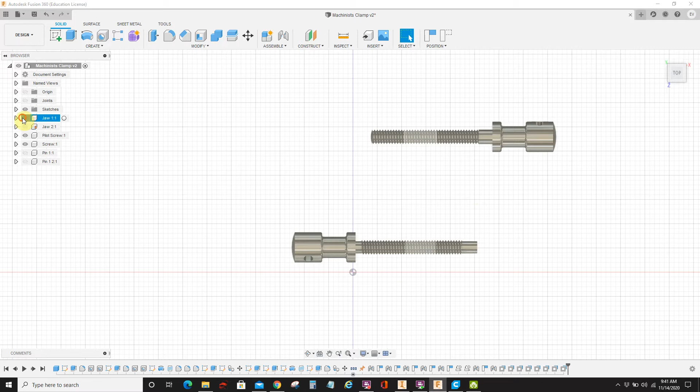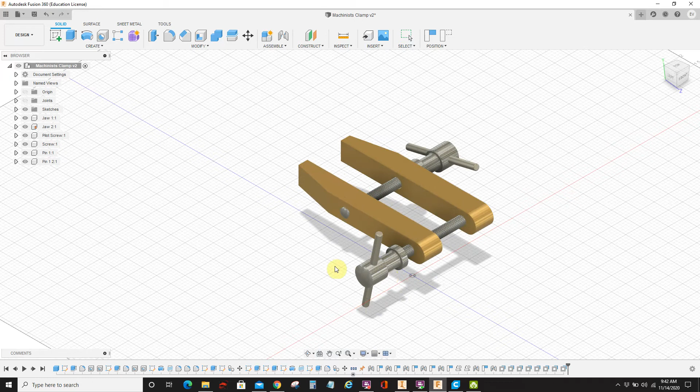Let me show you something else here, a project that I'm working on. Let's pull this out. Make a little clamp. This is a fun piece I did in Fusion. I would love to offer an advanced solid modeling course so we could do more stuff like this. But with the solid modeling course, with the time that we have, you can only go so far. It also depends on how motivated you guys are.

Anyway, back to here. I am such a slob. Alright. This is one of the jaws, and this is very flimsy. And this isn't the jaw I want because this jaw does not have threads in it. That's the other jaw.

Kitty. Where's the other jaw? I just had the damn thing. Sorry about that. I had the darn thing a minute ago. Anyway, there it is. It's behind me.

This is the jaw. This jaw has threads. This one doesn't; this one's got a tolerance. Goes through like that, and then it's to thread in. Anyway, it doesn't thread. So I did a little test thread with the 5/1000th of an inch, and yeah. So I'm going to run this again with 5/1000th of an inch. Now let me show you what I did here.

The printer, I got one of these, see it? There we go. Old school USB cables. I'm trying to show you that you can actually see it. Okay, there we go. These old school USB cables from my old phone that I don't even use anymore. Put it in here. All right. Hello. Got that right? There we go. And then the other end into my computer.

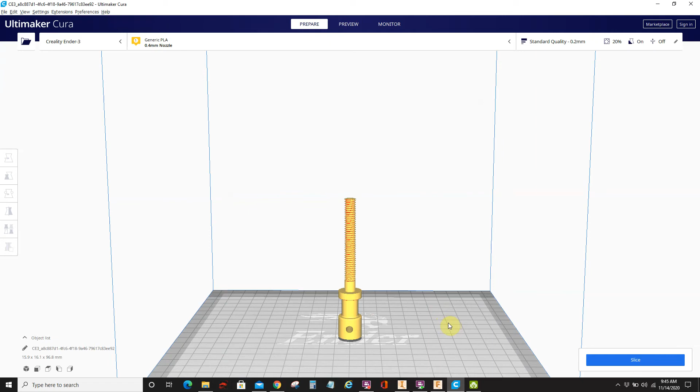And let's go back to... I'm a pro. I'm a visual communications pro. Anyway, go back to Cura. So here's my part. Now, when you plug this in, well, let me unplug it for a second. You go to monitor and you get nothing. Okay. When you plug it back in, you go to monitor, and this pops up.

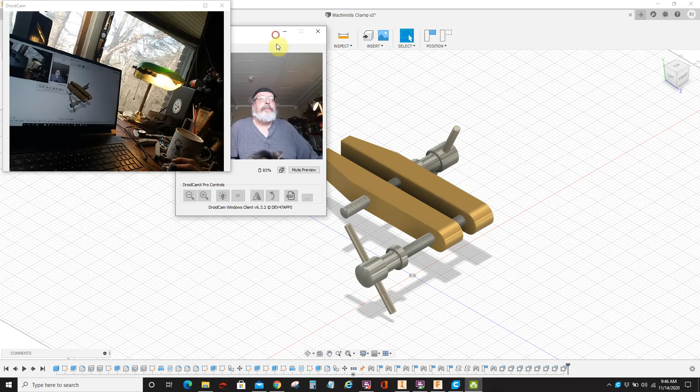And I turn on my printer, and when, let me switch back. You're not gonna be able to see it. Let me do split screen. So I'm gonna do a split screen. Why is that in my way? Okay. Anyway, you're not seeing this. When I hit the, all right, let's just do this. Wait, no, that's cool because you're getting that. I'm so confused. I'll put the camera on the printer. There we go. That's how this is going to work.

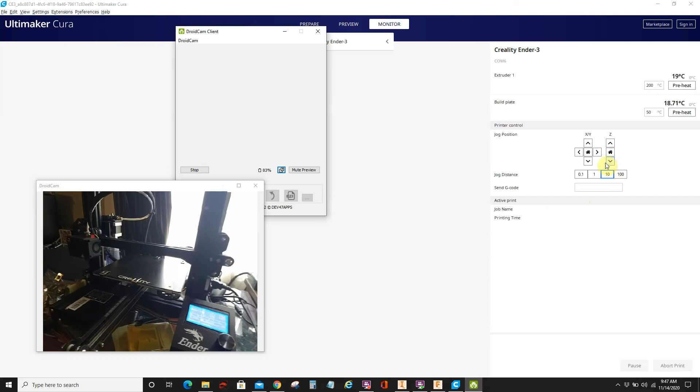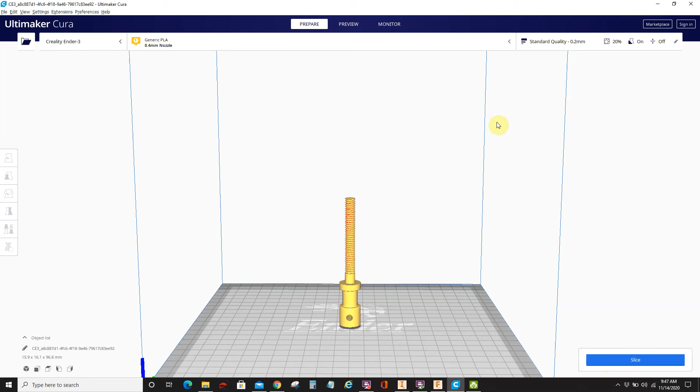I hit the home button. And it starts to home. Okay? So I can control everything here. So if I go back to prepare, and then since this model has got these overhangs, I'm going to change this up and add supports, and then do the slice. About an hour. It's not showing my supports, but I'm gonna hit preview. There they are. That's gonna be a pain. Oh well. But I had to do it on the other one, so it's not too bad.

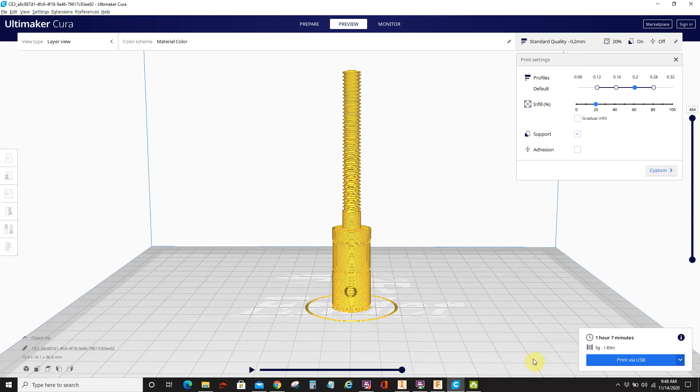Now I can print via USB or click here, save the file. Via USB is basically through the USB cable to the printer. So I'm going to hit print via USB, and you can see it starts preheating the build plate. I probably should have done a preheat, but once the build plate gets up to temp, it will start heating the extruder, which I didn't think it did that.

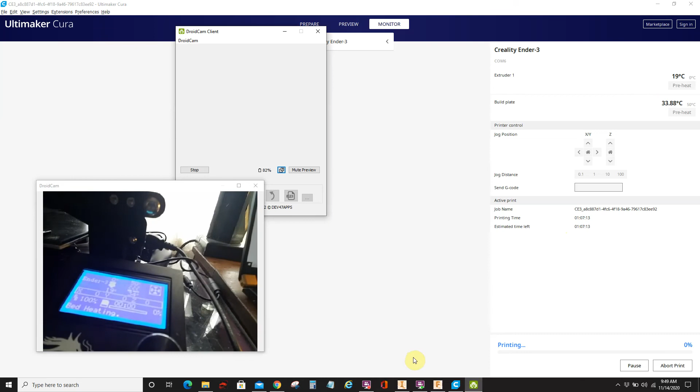You did it directly from the USB from the Ender, but be that as it may, you can see that it is in fact heating up. 34 degrees, 34.9, 35 degrees there. So now I don't have to fiddle with that little inky dinky card. One thing that I did read though is that, turn off if you're going to try doing it this way, which is very convenient. You don't have to fiddle with the little card. I guess that's the biggest advantage to it.

But one thing that I did read up is make sure that you turn your power saver off so that your computer doesn't shut down. So if you got a 3-hour build, make sure your computer doesn't turn off, because it doesn't send the information to the printer, it keeps it in your computer. So you need that USB connected, and you need your computer turned on the whole time of the build. So if you're going to do a long build and you're not going to be around and you don't want your computer running, then I would use the little card they give you.

So with that said, this is not your next assignment. I'm just showing you what I'm doing. We're gonna go on to using a different type of... We're gonna go to snaps. Plastic parts, when they fit together. And anyone in plastics has probably encountered this before. The little snaps that you use to fit pieces together. If you got, say, 2 pieces, some sort of case, you snap them together. That'll be next. I don't have a lesson up for it yet. We'll probably get it up early next week, if not this weekend.